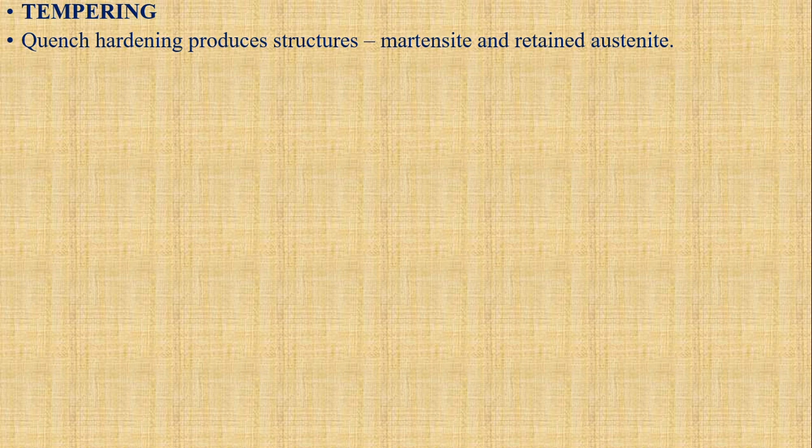Tempering. Quench hardening produces martensite and retained austenite. The martensite formed in quench hardened steel is exceedingly brittle, hard and highly stressed. Cracking and distortion of the hardened article is liable to occur after quenching. For this reason, the use of steel in this condition is inadvisable except in cases where extreme hardness is required.

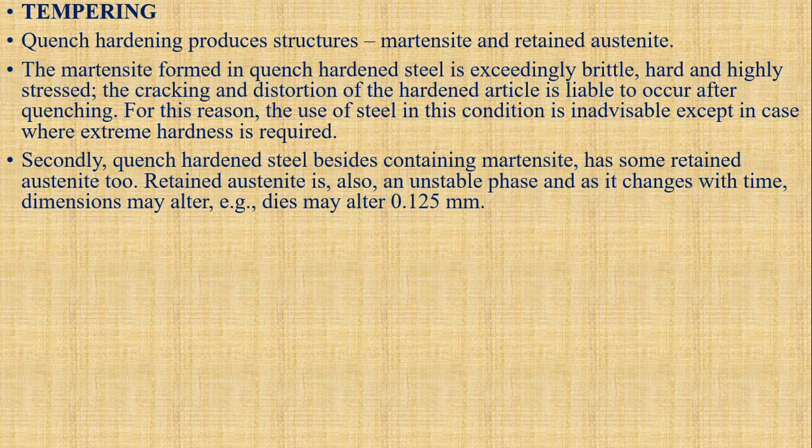Secondly, quench hardened steel, besides containing martensite, has some retained austenite too. Retained austenite is also an unstable phase, and as it changes with time, dimensions may alter. For example, dies may alter 0.125 mm.

It is therefore necessary to return towards equilibrium after quench hardening by heating hardened steel to a temperature below the lower critical temperature. This is tempering.

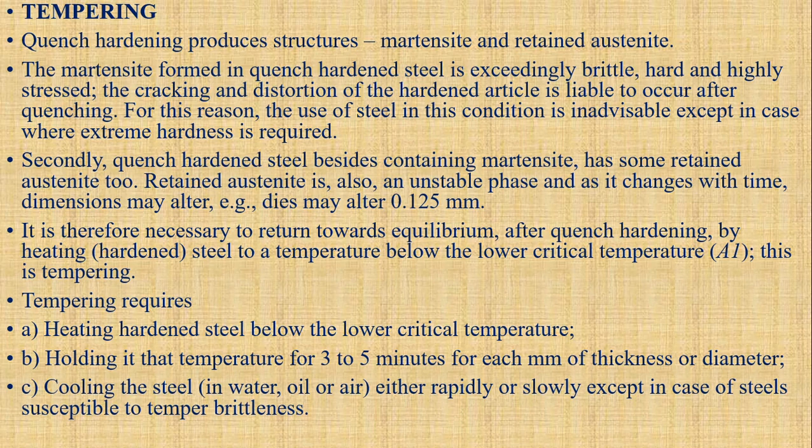Tempering requires heating hardened steel below the lower critical temperature, holding it at that temperature for 3 to 5 minutes for each mm of thickness or diameter, then cooling the steel in water, oil or air, either rapidly or slowly, except in case of steel susceptible to temper brittleness.

Stages of tempering. At low tempering temperature, approx 80 to 200 degrees Celsius, a hexagonal close packed carbide called epsilon carbide begins to form, and with this rejection of carbon, the crystal structure of martensite changes ultimately from tetragonal to the body centered cubic characteristic of ferrite.

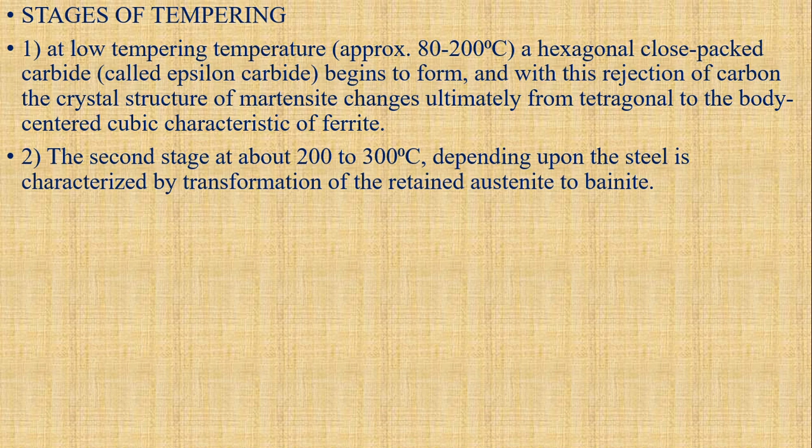The second stage, at about 200 to 300 degrees Celsius depending upon the steel, is characterized by transformation of the retained austenite to bainite. During the third stage, from 300 to 475 degrees Celsius approx, there is formation of Fe3C cementite from epsilon carbide and a change from low carbon martensite to cubic ferrite.

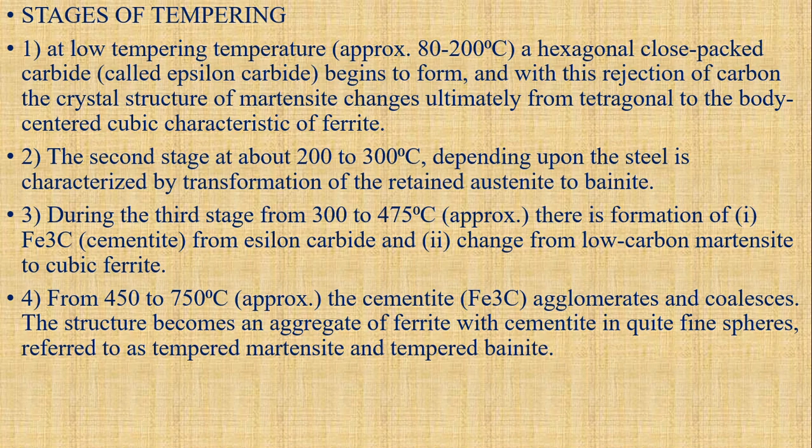From 450 to 750 degrees Celsius approx, the cementite Fe3C agglomerates and coalesces. The structure becomes an aggregate of ferrite with quite fine cementite, referred to as tempered martensite and tempered bainite.

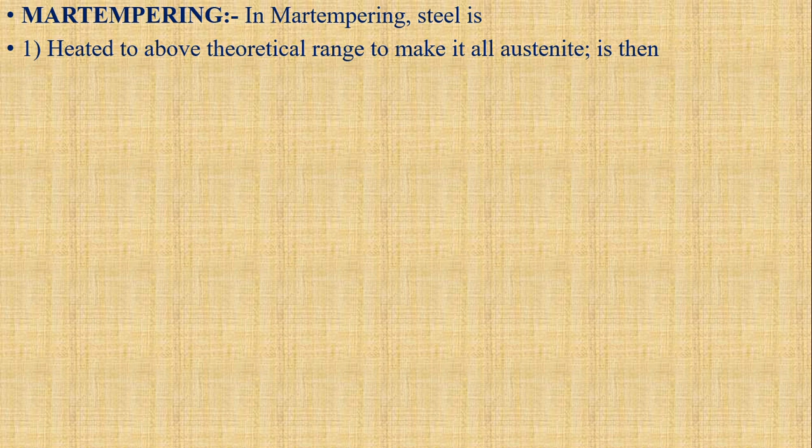Martempering. In martempering, steel is heated above the critical range to make it all austenite, then quenched into a salt bath maintained at a temperature above the Ms, and held at this temperature long enough until the temperature is uniform across the section of the workpiece without transformation of the austenite, and subsequently the workpiece is cooled in air through the martensite range.

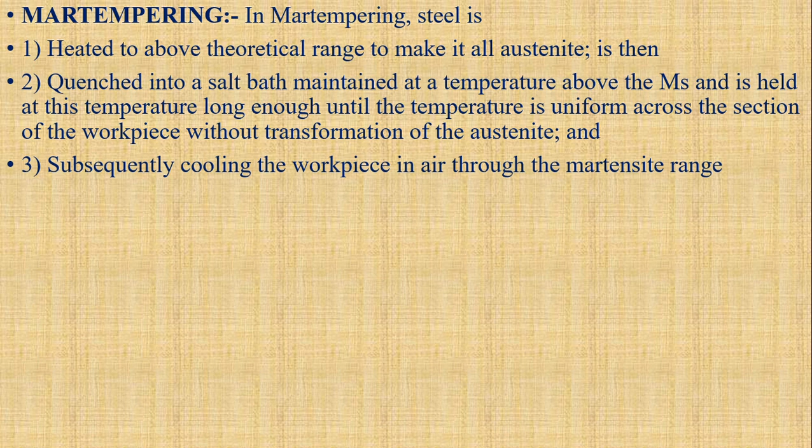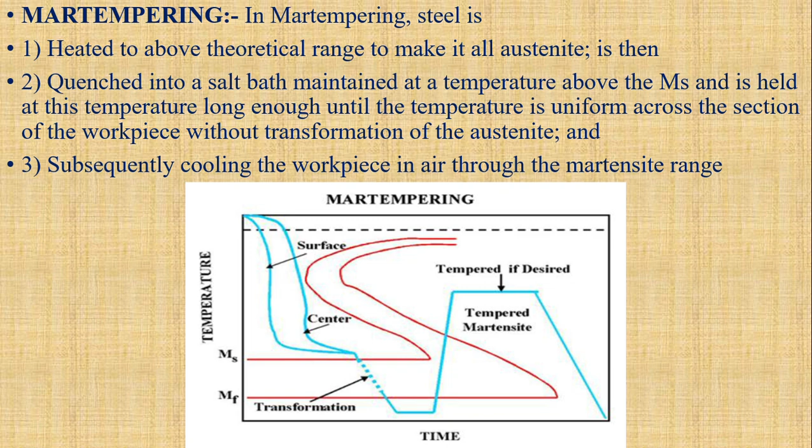Here the martempering figure is shown. On the left side, temperature is shown with Mf and Ms. On the x-axis, time is shown. The result is the formation of martensite with a minimum of stress, distortion and cracking. The steel thus obtained may be further tempered in order to increase ductility.

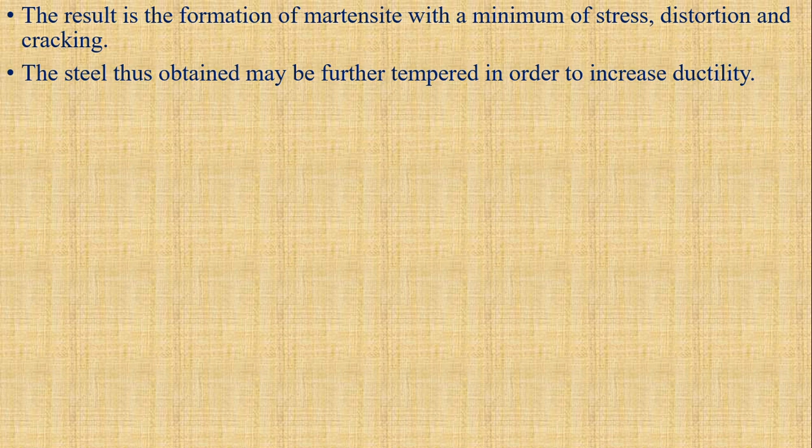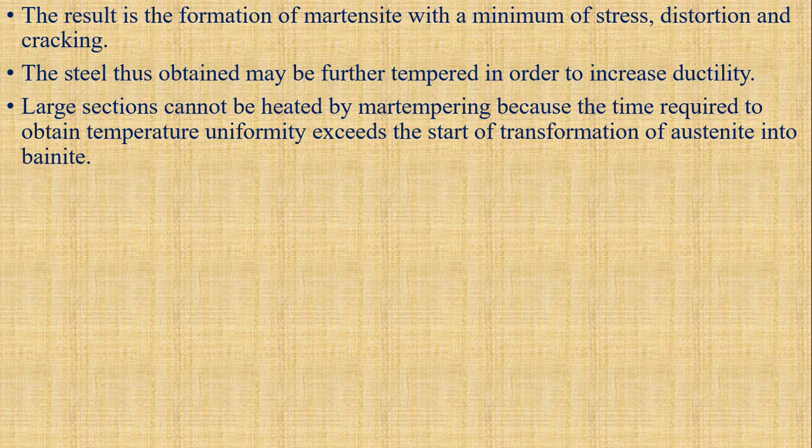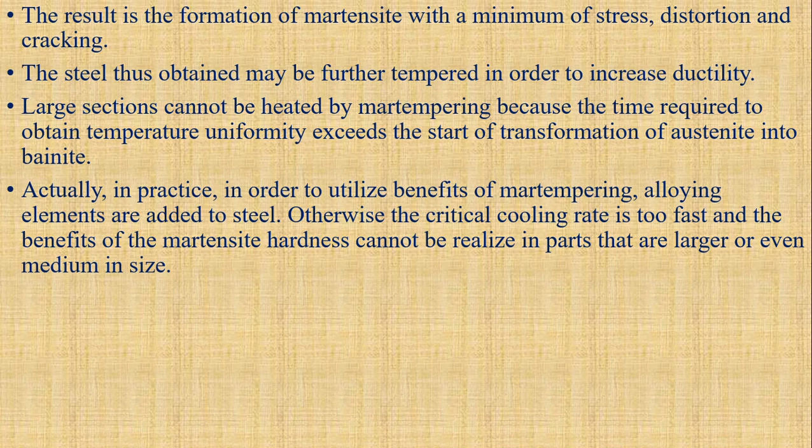Large sections cannot be treated by martempering because the time required to obtain uniform temperature exceeds the start of the transformation of austenite into bainite. Actually, in practice, in order to utilize the benefits of martempering, alloying elements are added to steel. Otherwise, the critical cooling rate is too fast and the benefits of martensite hardness cannot be realized in parts that are larger or even medium in size.